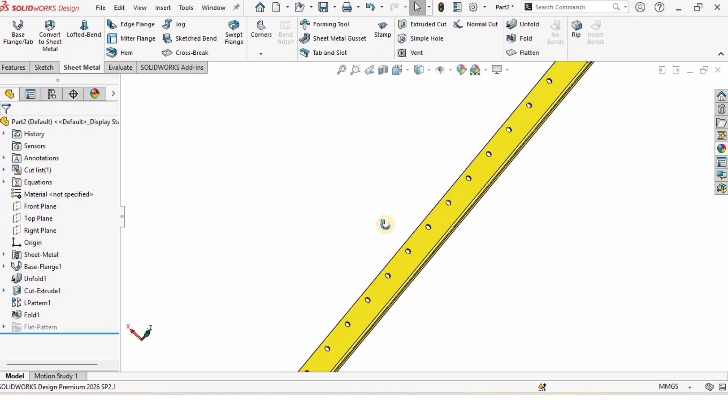Hey everyone, and welcome to this SOLIDWORKS Assembly tutorial in which we will learn how to assemble this rack, and we have modeled all the parts in our previous video. So let's begin. So this is our stand that we have modeled.

So select the file, and here we have option to make assembly from the part. So simply select this option and then click here in this environment, and now we are in the assembly environment. So you can orient it properly. After that, you need to select the insert component and click on browse, and then you need to go to the directory where you have saved these parts. Then I will select this base plate that we have modeled in our previous tutorial as well.

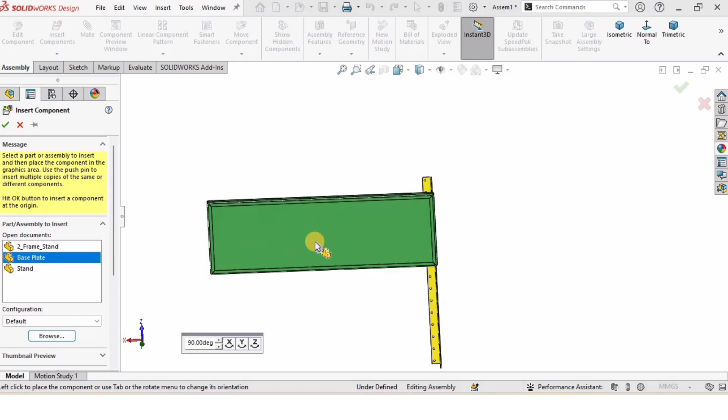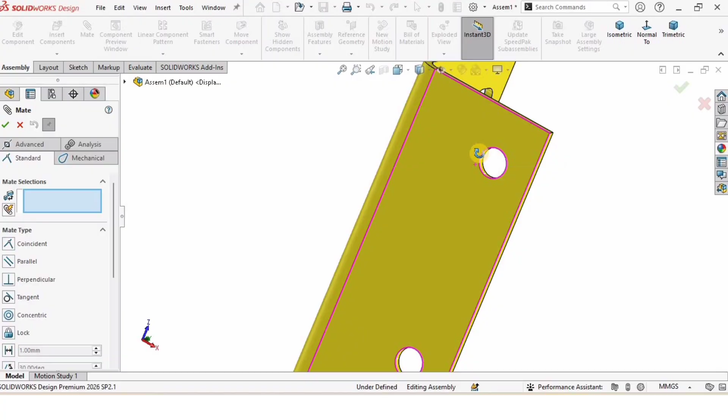You can change the orientation from here just like that, or you can simply drag and rotate it. It's up to you. Now I will set this orientation of the base plate by rotating it so that its flat face is on the top side, just like that. After that, I will select the mate. Then for the mate selection, I will select this inner side of the hole for the stand and inner side of the hole of the base plate. This is concentric mate. After that, I will check the box.

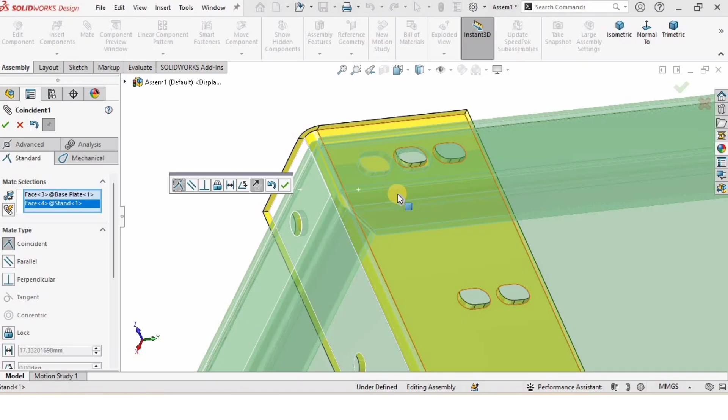Then let me drag it just like that, and let's select this face of the base plate and this face of the stand and check the box. I think there is mismatch, but let's check the box for the mate, and as you can see there is some mismatch. So let's fix this mismatch. So let me delete the last mate, and let me drag this base plate to the left side, and let's select the mate.

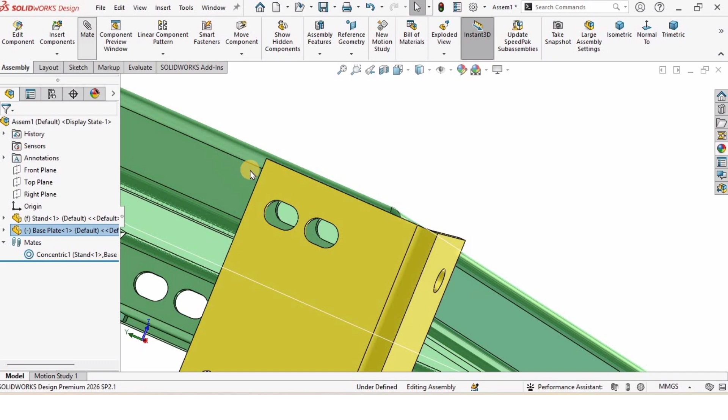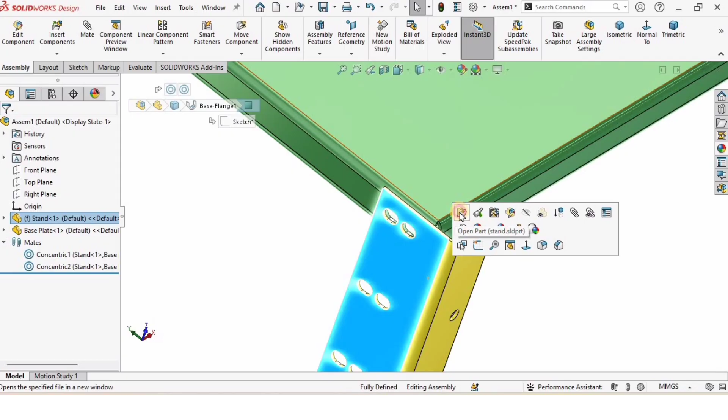Let me delete already selected, and for the mate selection I will select these two arcs for the stand and for the base plate and check the box, and we have got some mismatch which we need to adjust. So right click here on the stand and select this very first option, which means that this will be opened in separate part file where we can edit it.

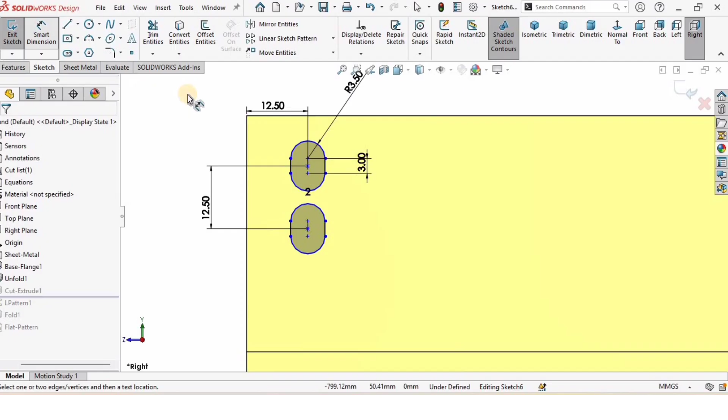So simply drag this design tree upward so that we can simply see this extrude cut for these slots. Right click on the feature and click on edit sketch. Let me edit this sketch now. So I will change this distance. So I will simply delete it first. Then from this midpoint of the slot to this edge I will specify the distance. So this has to be 8.5,

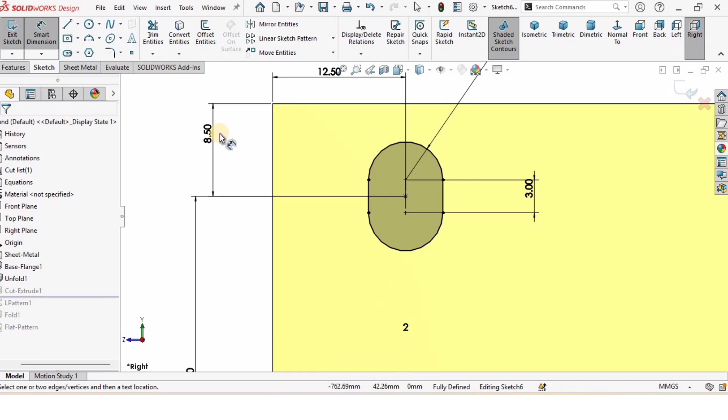which will move the whole sketch upward, and then this 12.5 needs to be changed, this needs to be 25. Also we need to make similar changes in the base plate. So this is 8.5 and this is 25. Now let me exit the sketch. I will press Ctrl S, and then I will move it down. Press Ctrl S, or otherwise you can go to file, click on save, and then simply hit the cross button. So as you can see, we have to modify the base plate as well.

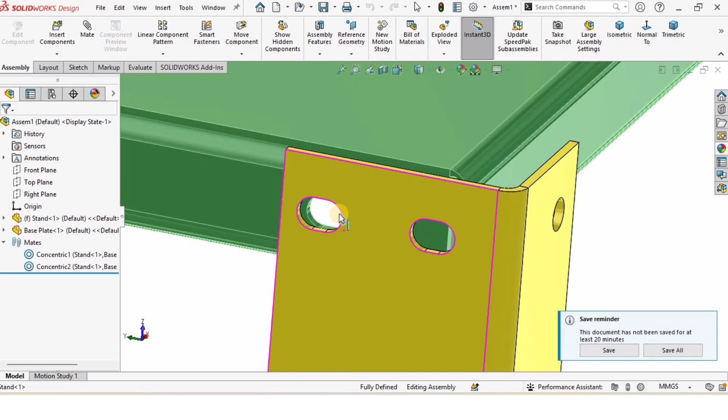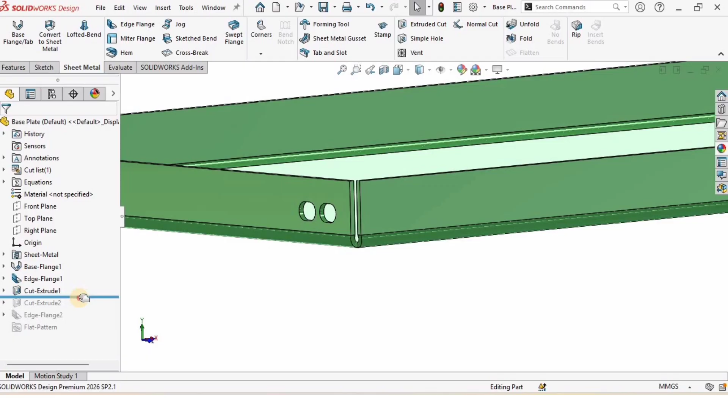So I will right click on the base plate and select this very first option, which means that the base plate will be opened in a separate part file. Let me modify this as well. So here we have this cut extrude, this right here. When I select, the highlighted one was the slots. So let me verify by dragging the design tree upward, and right click here on this cut extrude and select the edit sketch, and let me change this 12.5 distance to 25.

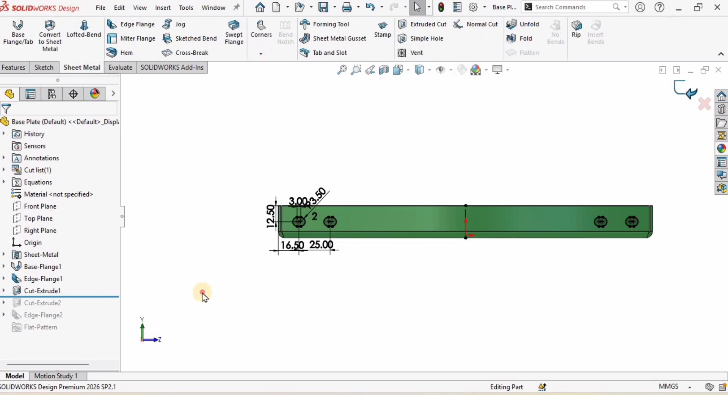So I will double click on it, I will change it to 25. So this is the modification on the base plate side. Exit the sketch from here. Now drag this design tree down. I will press Ctrl S or go to file and click on save, and then simply hit the cross button, and this modification will be updated in assembly as you can see it from here.

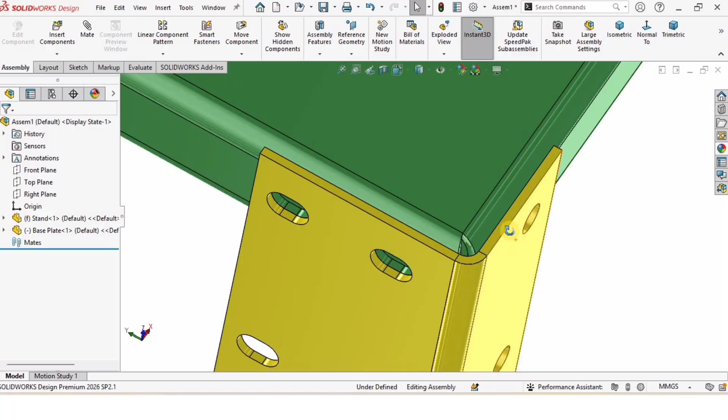Now we have got this error, so right click here and delete this one, and let's delete this as well. So delete all the mates, move this base plate forward and to the right side. Okay, let's select the mate again, and in the mate selection window I will select the inner circular face of the base plate and inner circular face of the stand. Check the box, this is a concentric mate.

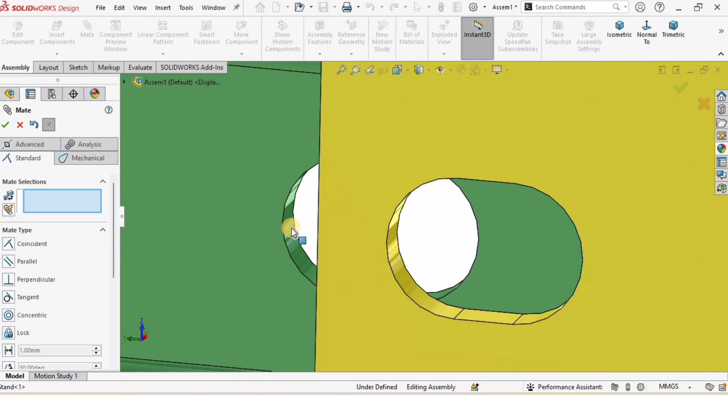Okay, now I will select this inner side of the slot for the base plate and for the stand and check the box. This is also a concentric mate. Okay, now mate selection is fine. Now let me mirror the stand to the left side. So I will select from linear pattern drop down. Here I have option for the mirror component.

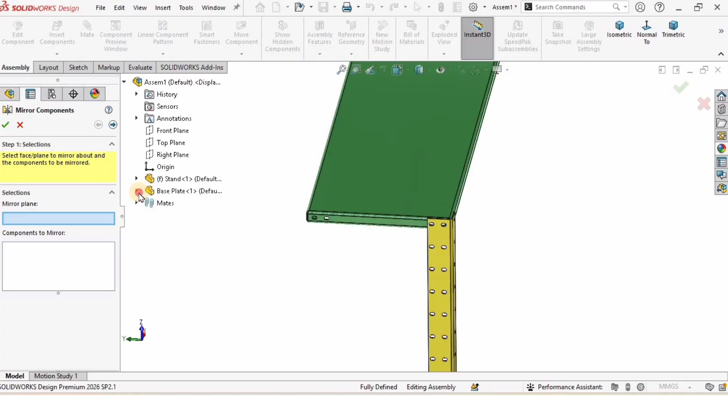In the first window I need to select the mirror plane, so it should be like this for the base plate. So drop down this directory, and here we have base plate, this right here. Simply drop down and find the plane, this one. For my case this is the front plane, in your case it can be different, but it should be this one. So then I will select the stand in the next window, and if I click the next button and check the box, here we have the features mirrored.

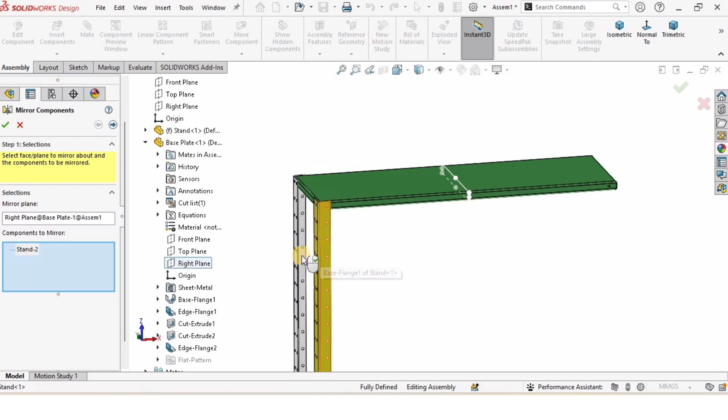Then let's select the mirror component once again. This time I would require a plane. Let me clear this one. So first let's specify the plane for the base plate, and this time it should be this one, cutting this part in half. In the next window I will select these two stands. If I select this button and check the box, then we have the stands mirrored on the other side as well. Now I will select the linear pattern.

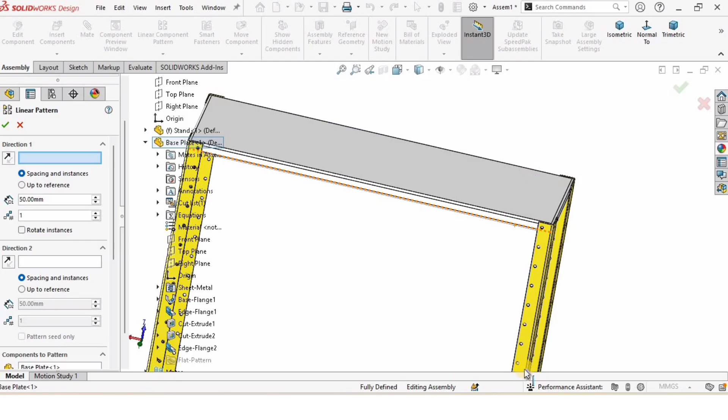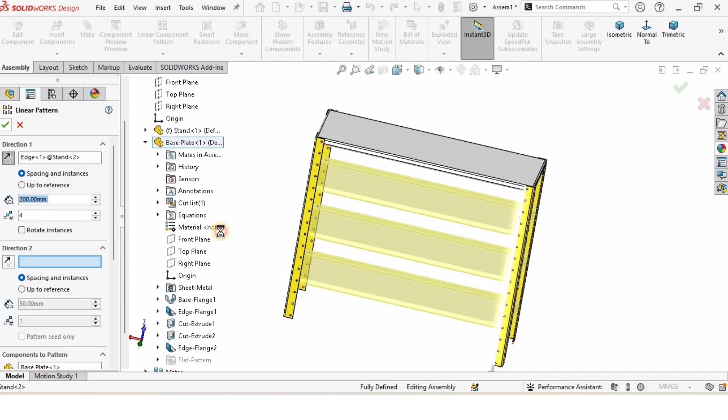Let me clear this one, and in this window I will select the base plate, and in the first window, which is the direction window, I need to select this vertical reference line, this one for example. Then I have to increase the number of plates. So let's say we would require this number, and we can change the orientation direction from here as well. We can change the distance from here. Let's say this is 200 millimeter and 4 is the number. If I check the box, here is our complete assembly of the rack.

So let me verify if the holes and the slots are at the correct orientation, so that they can be bolted as well. As you can see, they are correct, so they can be screwed, or you can assemble this by any means of fasteners. So that's all for this video, guys.